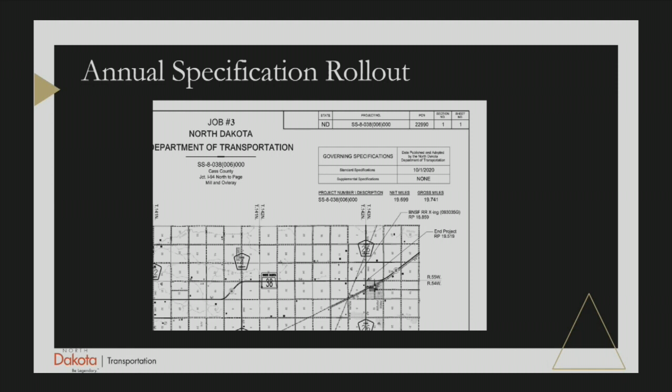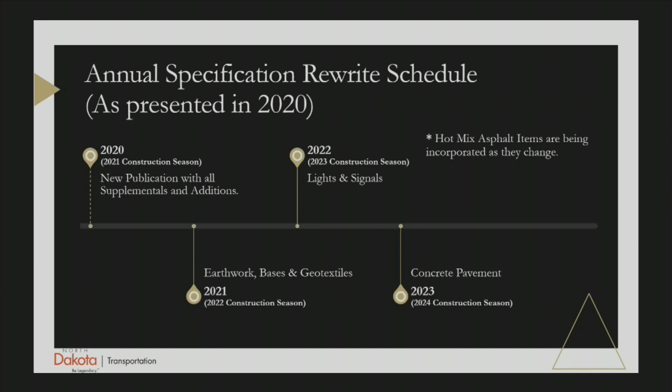So annual specification. Well, what does that actually mean? It means a couple of things. This slide here is what was presented last year. And obviously all these years changed because we're kind of skipping 2021 from a publication date. The only thing that's going to be the same on this next slide is that asterisk item about hot mix asphalt, because that's a pretty huge ongoing process for us.

our practices up to current industry standards, are what we're asking for materials up to current industry standards. Are we getting what we want out of these? Is there confusion and stuff? So these are gonna take intense reviews. At the same time, we are still going to be doing those minor adjustments, I guess I'll call them, the things that would have typically been a supplement within sections year to year.

So just because it says concrete pavement isn't going to get updated until 2024 doesn't mean that there won't be changes in there that could occur in the meantime as something becomes necessary to change. That's kind of how that's going to look. Obviously, if something drastic happens, we'll take a look at something earlier. And again, the HMA stuff is being looked at on an ongoing basis.

And there's actually going to be a session later in the OPD construction series that talks about some of that stuff a little bit more in depth. I'm going to touch on it a little bit, what we're doing here coming up, but there'll be a longer discussion on that at a later date, I should say.

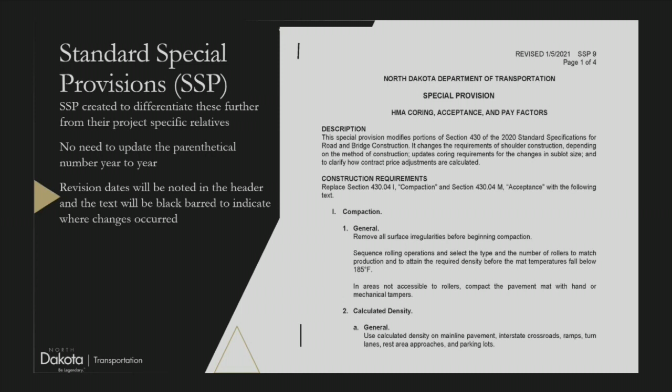So one other change, and this actually just went live earlier this week. The plans preparation guide website where we house our notes, I think everybody's used to looking out there for notes as they're putting projects together, had a recent update. There was always a special provisions sub web page there, but there wasn't a lot of information on it. I'll fully admit that. It just kind of had some general, here are some potential special provisions.

Some things we probably won't, just because they are so drastically different from project to project, and they change so often. It wouldn't be a good idea to put it out there and have people assume it was the same. So you might not always see a draft to look at, but again, if you need something, get a hold of us, let us know, and early is better when it comes to special provision requests. It oftentimes seems to catch us at the end and we've got to scramble to put something together for folks, and we do our best, but it helps everybody out if we can get those requests earlier in the project development process rather than at the PS&E or sometimes later, because we do want those special provisions to be part of the PS&E review even. So just a reminder there.

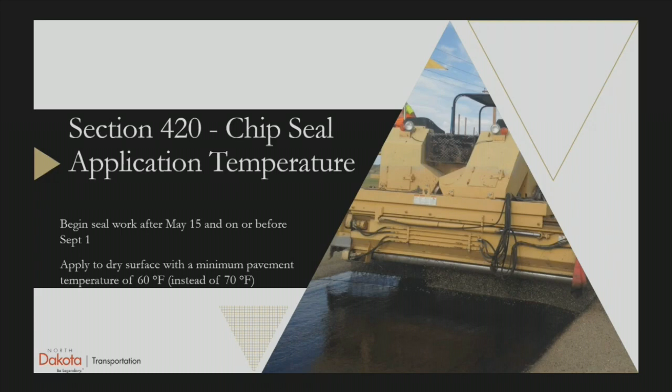Some of the HMA items that I said I was going to talk about. There's 3 standard special provisions for hot mix asphalt. Joint density, which was something that we obviously implemented for the first time last year as a major thing. We went through some growing pains with that in the summertime. We issued a kind of weird halfway SP where we said, hey, if your contractor wants to do this notched wedge concept, have them use this SP instead.

This new one incorporates all of those concepts into one thing. So we changed quite a bit. And again, like I said, this is going to be talked about more in depth in the later session. So tune in. I think it's one of the April ones, so it's a few weeks out.

The bitumen testing price adjustments: this replaces a document that was only found on the website. The specifications in 109 referenced that document. It was hard to find. And it also didn't cover the current oils that we're using for hot mix asphalt.

So this new document replaces what was on the web before and includes provisions for the polymer modified asphalts that we're using, the ones with the letter designation in the PG oil grades. So that's something that's out there, and hopefully we'll get a way to put that in the spec book figured out sooner rather than later.

And then HMA acceptance, I kind of showed that one earlier without really getting into the content. There were some issues that were decided late in the game on how we were going to do coring this year that necessitated putting an SP together on the fly a little bit to line everything up. So that's what that is.

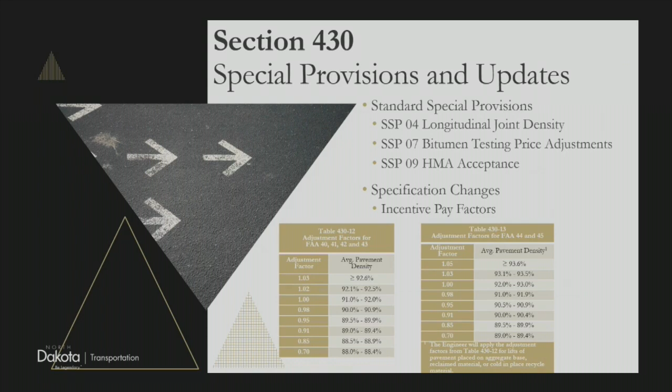550 concrete paving. Ride SP. So one of the first things that happened when I came over to technical services, about 10 years ago, was the concrete ride SP was an SP. And we decided, hey, we're doing this on all our concrete projects, let's just put it in the book. So we did that. I believe it was even a supplement for a while, for a few years before the 14 book came out. 14 book, it was obviously right in there, black and white.

We learned that was probably not the best solution. We probably should have kept it as a special provision for a couple of reasons. One, it sort of interrupted the good flow of Section 550 by introducing the surface tolerancing in the middle of the construction requirements, which it is a construction requirement, but it was so long, it just sort of broke up the ability to properly read that and kind of digest it in a good way.

The other thing is it helps materials and research. By being a special provision, we can sort of make a list of projects. So that helps materials and research know where they're going to have to go collect data in a given season, so that they don't get any surprises.

And the final reason that we pulled it out is because it was technically applicable to anything that was bid under our book under 550, and to go collect this ride data with mobile equipment and kind of high level stuff like the DOT has. Well, not everybody that bids under this has that equipment, and we're not able as a department, as an agency, to go do all of that for these local agencies. So we had to pull it back a little bit.

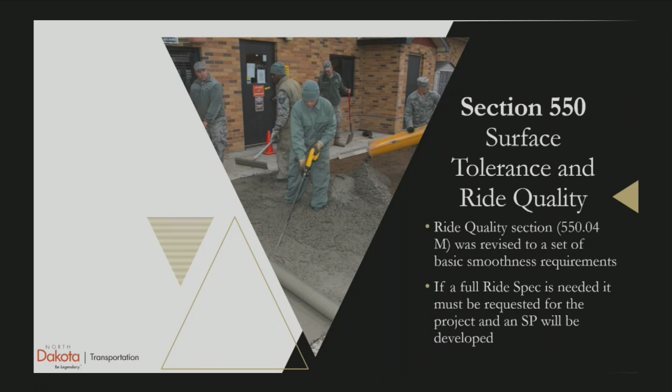Next up, some structures changes here. Form removal in the specification was kind of overly complex, I guess. Our bridge division approached us on this. There was a table in there that talked about where the forms were and how quickly they could be removed. We did away with the table and kind of made everything a lot more uniform.

So deck slabs have a longer period of time there and a maximum. So they've got to be pulled off within 28 days, but after 14. So there's a window there. And then everything else has to be left in place at least until the curing period is completed. So something to keep in mind if you're going to be on a structures project this year, that those form removal requirements changed quite a bit.

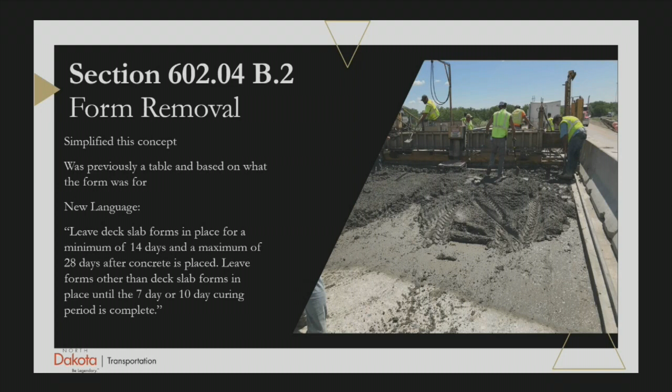There are additional minor clarifications in 602. I'd say a fair number of them. So please refamiliarize yourself with those, with 602. But I can say that of all sections. You never know how long it's been since you might have looked at something. So take a fresh look at everything is highly encouraged, at least for me.

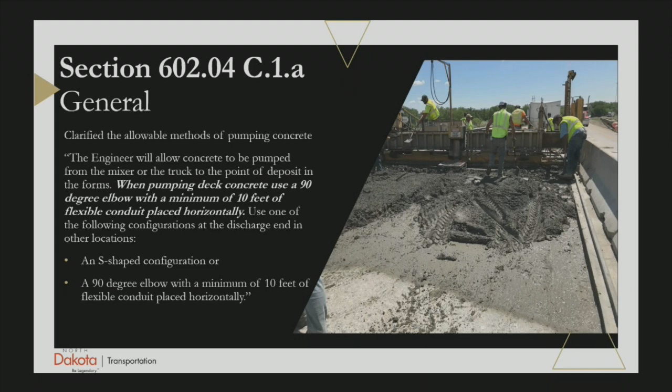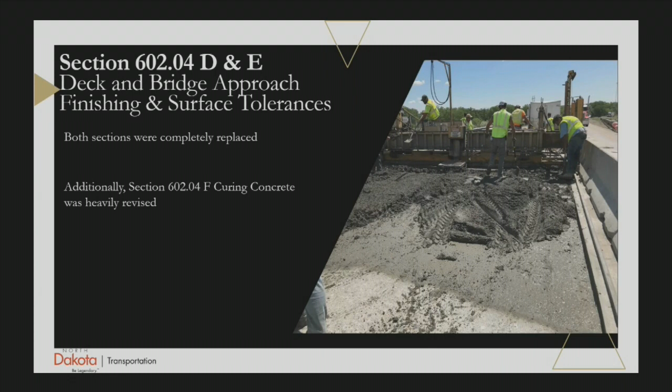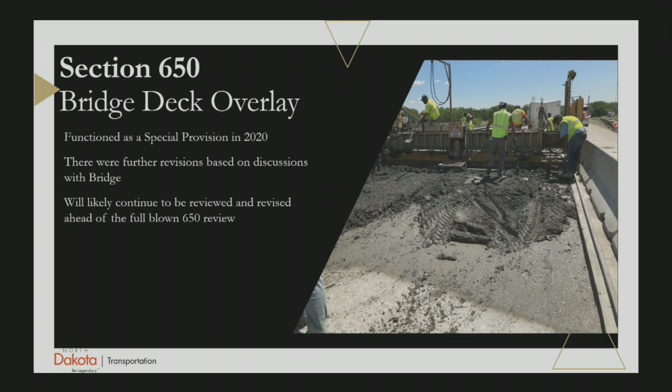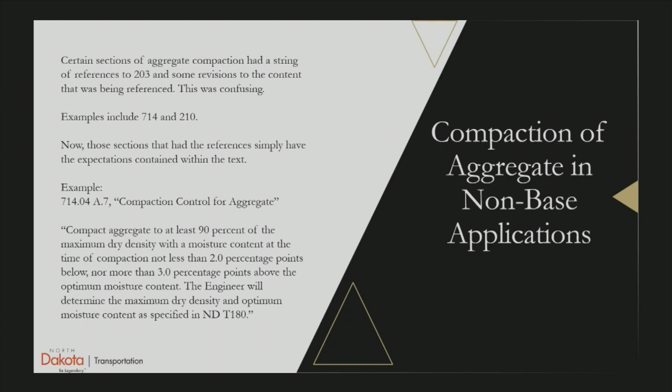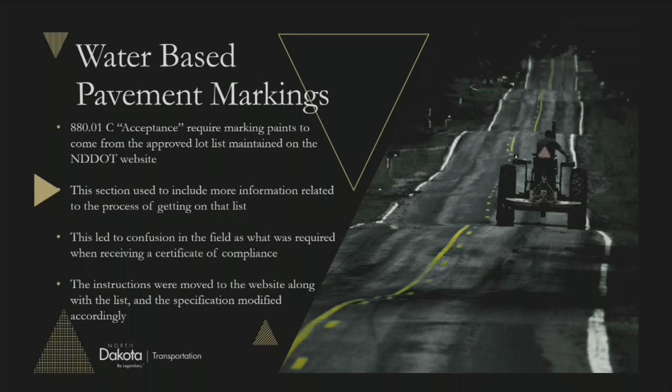That is all I've got for my stuff. Are there any questions out there, Jeff?

No, it was a very thorough talk, Justin. Always a lot of stuff going on in your guys' world. Seems to be, yeah. Yeah. Very interesting. Okay, thanks, Justin.